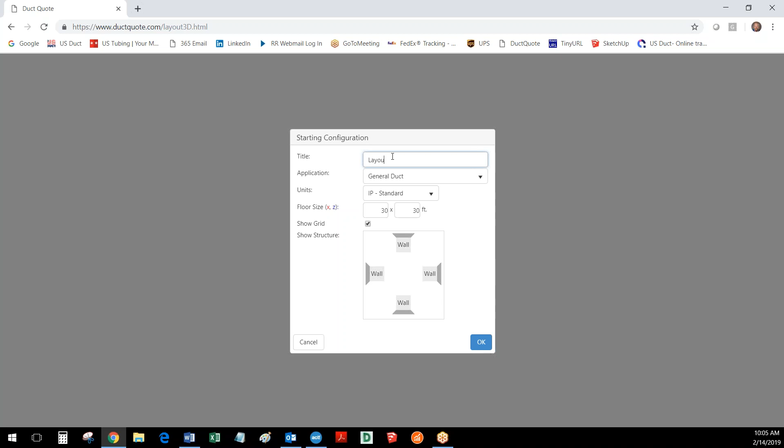So let's look at cloning a section of duct first. Let's create a new layout, and we'll call this layout 3. 30 by 30 will be fine.

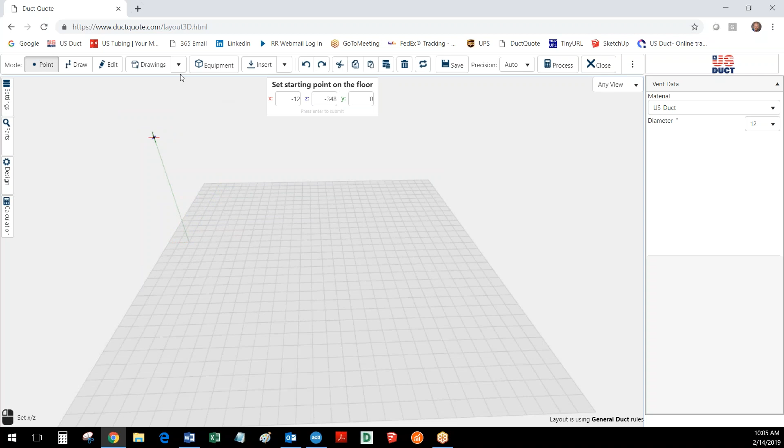We'll use US Duct again, and I'm going to start with creating a 12-inch trunk. I'm going to set it about 10 feet from the ground. And this first piece we'll draw at 60 inches.

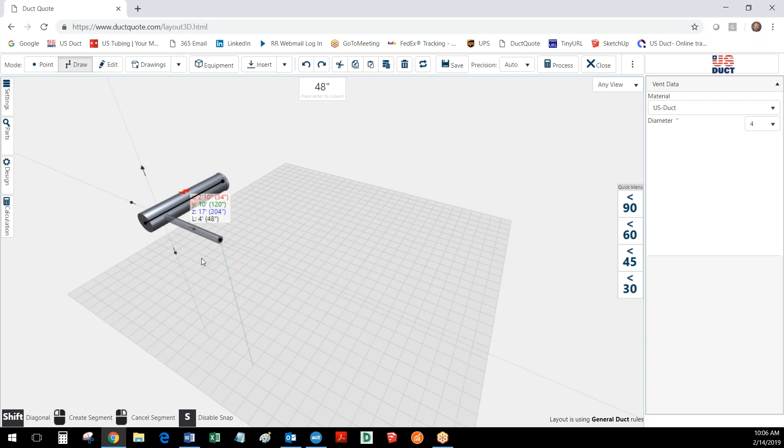So now I'm going to draw a branch, a 4-inch branch, and I'm going to place it about 10 inches from the inlet. So right about there. I'm going to come out 4 feet

and go ahead and break that in. And then we're going to put a drop on this. It's going to have a 5-foot vertical drop. And then we're going to move this 2 feet back towards the trunk.

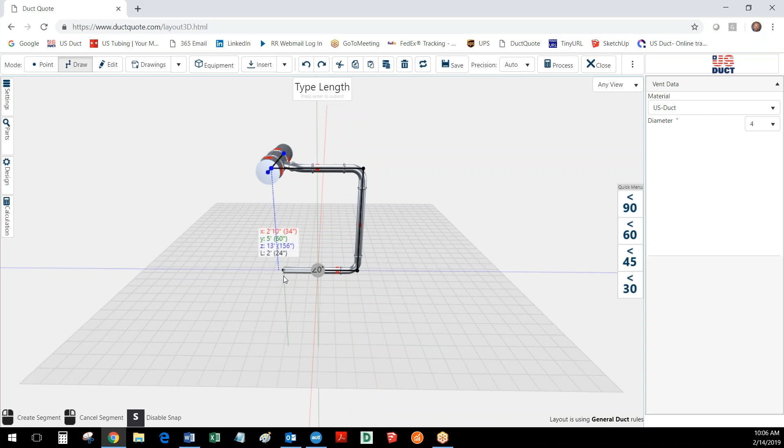Now what we're going to do is add 2 feet of flex hose to that. As you recall, in edit mode, we simply edit the inlet side of that. We add a hose adapter, and we get our flex hose.

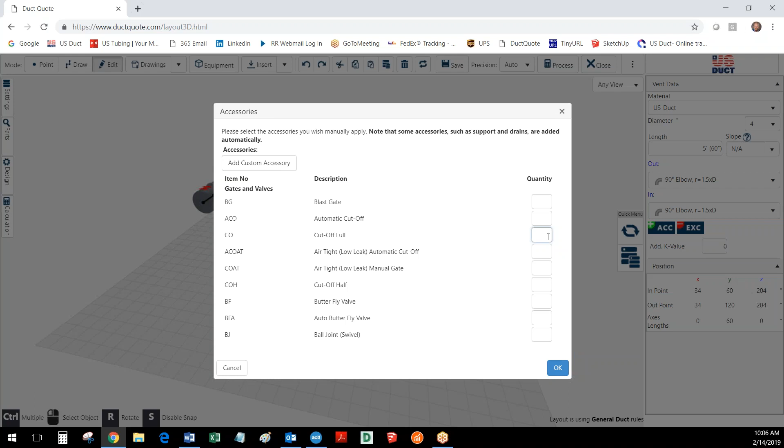Now while we're in edit mode, let's go ahead and add a full cutoff to that vertical section. All right, so as you can see now, we have a drop that would attach to a piece of equipment, a machine, horizontally. But what if we had 4 identical machines all lined up?

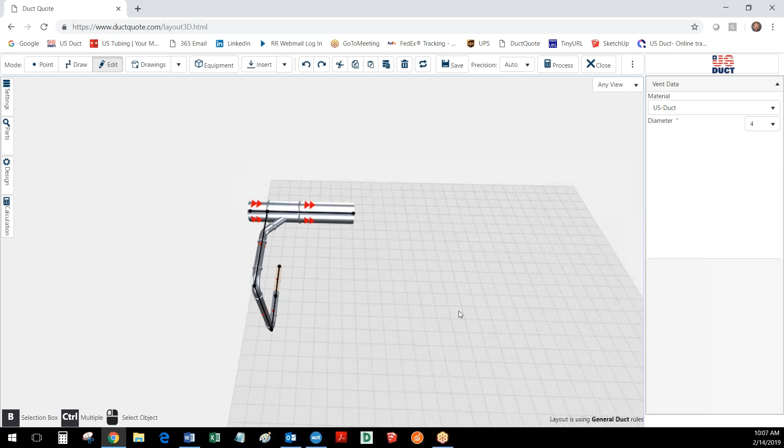Well, this is where that automation comes in. So I'm going to position this, and I'm going to use my box selection tool down here in the bottom left. And I'm going to select everything except that end little piece, and then I'm going to clone it.

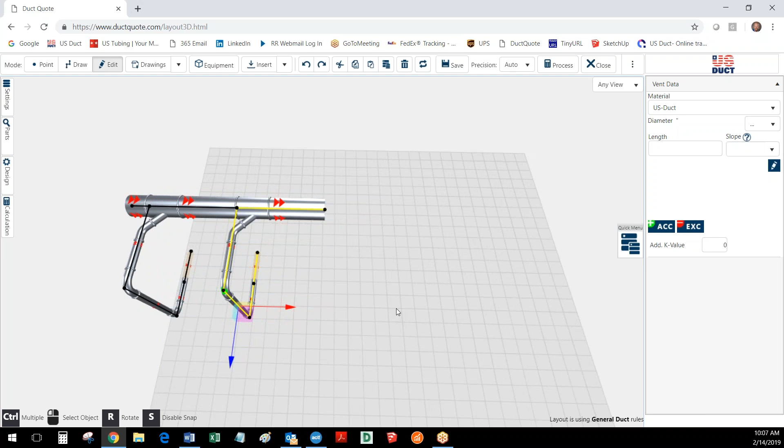Then I'm going to use my arrows. I'm going to click and drag, and I'm looking for that yellow dot right there that will allow it to connect. And then while it's all still selected, I'll clone it again, and we'll do the same thing, and then again for our final 4th drop.

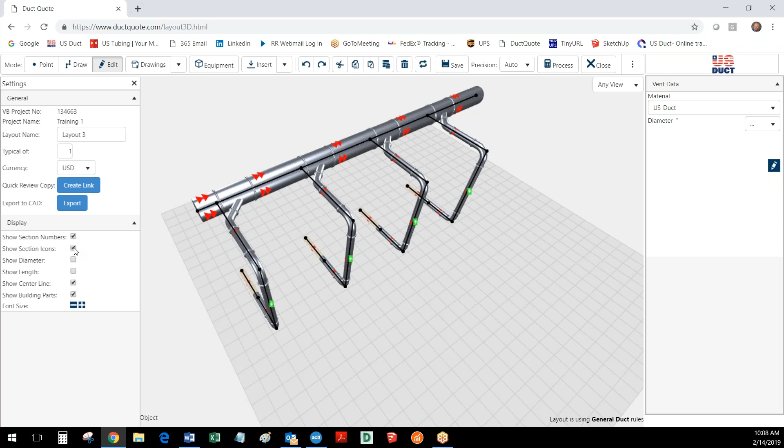And there we have it. Now, how do we know that our gates all went in? Well, I can turn on the icon and I can see that all 4 of them are showing our accessory icon.

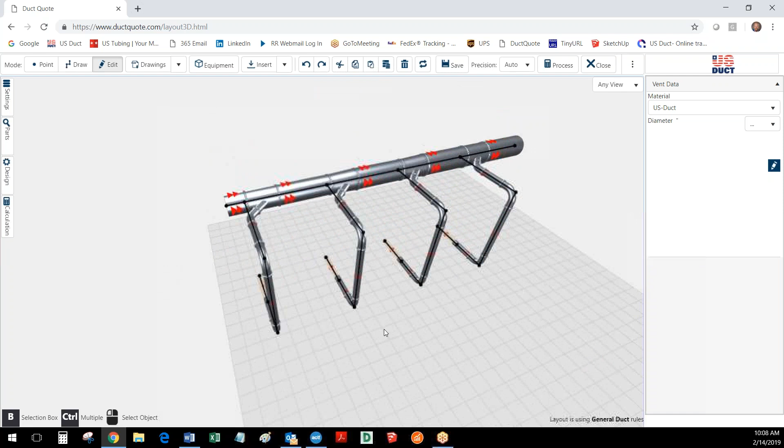And as we know, we're adding flow as we go along. We'll need to calculate this, and I'll do that in automatic mode. And there we have it — all 4 drops sized correctly, ready to go.

Now you can clone, and remember, this works on equipment too. If we had actually drawn in the piece of equipment for this first one, we could have included it. So watch this next segment that's coming up to learn a few tricks about accessories and fittings and how to add them, like we did here.